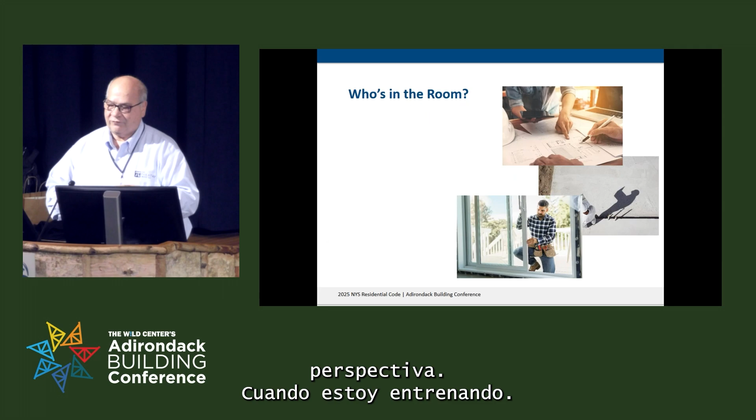Guess what, I speak all three languages. It's one that Wordly doesn't translate into, but I understand the problems of every one of you, so I try to put that into perspective when I'm training. Hopefully that'll help us through.

The other thing is, if you have questions during this, ask them. If it's timely, or I can stop, we'll stop. I'm hoping to leave time at the end, even though everybody will be itching to get out by then, to ask some questions. So let's have a dialogue, let it be you and me just having a conversation here. If you got questions, let's talk them back and forth. Like Josh said earlier, he likes to learn from these events as well, and I have open ears and an open mind, so I like your feedback too.

So we've got all these folks here, that's great. In this new code — well, in your day-to-day work, but in the new code — what do you guys find is your biggest challenge coming every day building? I know the code officials' biggest challenge is, probably I'm speaking for you, but there's a new code here, and I've got to get everybody on board to understand what it is I'm asking for.

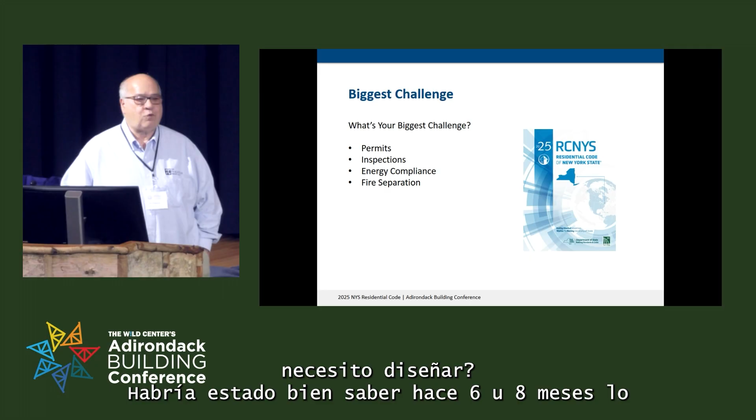So we can start getting the plans. The designers, you probably are saying, what do I need to design? It would have been nice to know 6 or 8 months ago what I needed to do for my projects that are now happening. Would have been nice to have the tools like ResCheck and ComCheck already built. They were in the works, by the way.

I'm a private consultant, but I am a contractor for NYSERDA too, so I work with Chris Scroy, who was here this morning, and I can tell you we had put all that stuff out for proposals. It was under contract, and we got it done as fast as we possibly could. You got to remember, the code really wasn't finalized until like September or so, so it was hard to get. And plus, the people who do ResCheck and stuff, they're also a government agency. If you can imagine how hard your life is, try taking two government agencies and trying to get them to agree to do something.

Hopefully one of these four are your biggest challenge. We're going to talk about the fire separation part of it today anyway, because there's a new emphasis on some of that stuff as well.

I'll try to keep the energy part out of my head, but they go hand in hand, and that's why I liked having the residential code with the energy code today. We're going to cover what's changed, and talk about some changes with administrative requirements and documentation, plus life safety and fire and life safety changes.

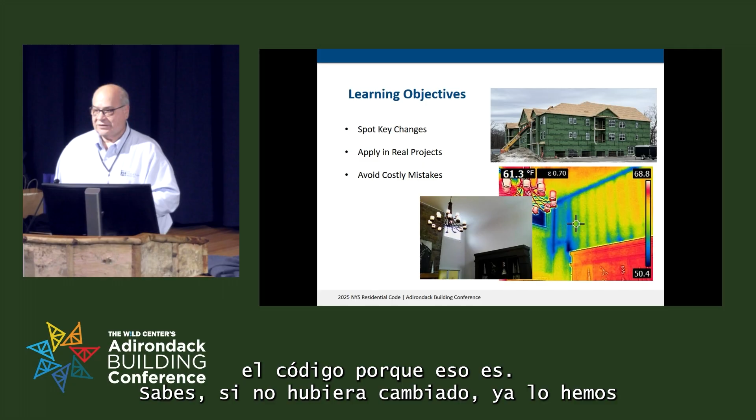So I'm hoping today you'll be able to spot the key changes in the code, because if it didn't change, we've already been doing it, let's just keep doing it, right? We'll be able to apply these changes in real projects, and hopefully avoid costly mistakes. Avoiding costly mistakes is going to come from a lot of thinking about your project ahead of time, thinking about what's needed ahead of time.

Your resources: as you probably know, our code, the 2025 Residential Code of New York State, is a modified version of the 24 IRC, just like all our codes, modified from the International Code Council's. So that's your biggest resource, our code. Don't follow the IRC so much, you want ours. There were a lot of significant differences in ours than there is in the ICC version.

However, one of the books I do like is the code commentary, the code and commentary from the International Residential Code. Even though that's not specific to New York, it's very handy. The commentary explains why and what it means, kind of puts it in layman's terms for us. There's also a book the ICC puts out called Significant Changes of the International Residential Code, which is handy as well. But remember, don't take it verbatim because it's not the New York specific version.

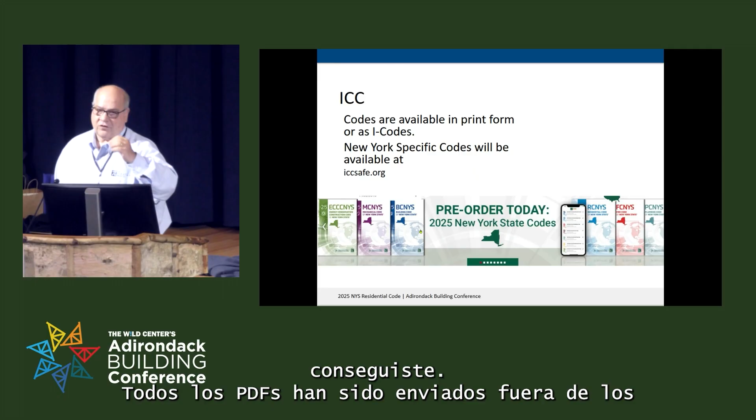NYSERDA funded purchase of a bunch of code books for the code officials. It's been dealt with through the DOS, and there was a survey put out last year asking every jurisdiction how they wanted their book, whether PDF or hard copy. However you responded is how you got it. The PDFs have all been sent out, the PDF rights or permissions have already been distributed. I believe the hard copies have not come yet or are coming. So if you're an authority having jurisdiction and you don't have your book, if you replied to that survey, which I think almost everybody did, you should be getting it.

Yes, thinking about that, I was at a state training. Got our books.

You should have your books at least a month or two. They actually did a pretty good job getting them out to print, getting them ready, which I'm surprised. And it's nice that this time it's a New York version rather than having to go to the ICC version and then take our amendments and then take our past amendments and so on. But thank you for that.

So you can get the books at iccsafe.org. If you don't want to purchase them, you don't have to. There's a free version of the New York State code on there. It just limits you in what you can do, you can't cut and paste, you can't search, well you can't use the AI search type of things. But it's free, it's the complete code. You can open it, and if you use Windows, there's the Snipping Tool you can use to capture it.

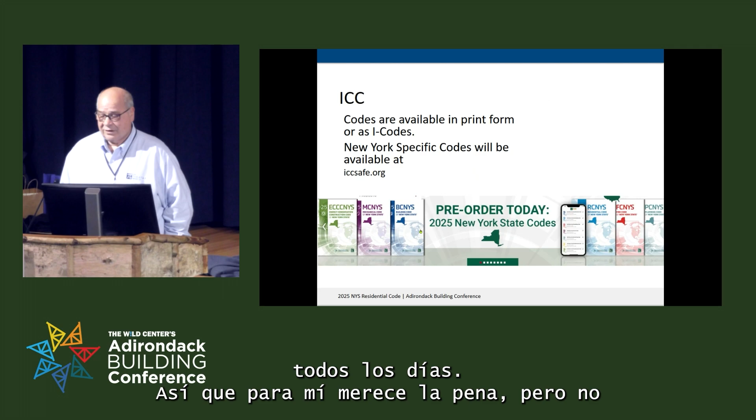But I don't have council or budget people to answer to. I just say to myself, do you want to spend it? And I say yes, and so I do. Unless it's something big, I have to ask my wife, and then the answer is always no.

Another place to use codes is upcodes.com. I love upcodes, it's simpler. It's more direct. I like it too because it has all the states in it.

ICC doesn't like them. They're back and forth in lawsuits all the time. But there's free versions of it. It's limited to what you can do with it, but it's very robust.

If you have the subscriptions, they have diagrams. When you search their stuff, it's a much better search than the ICC, as far as I'm concerned. So that's another place. There's no excuse not to have the codes because they're available for free either place.

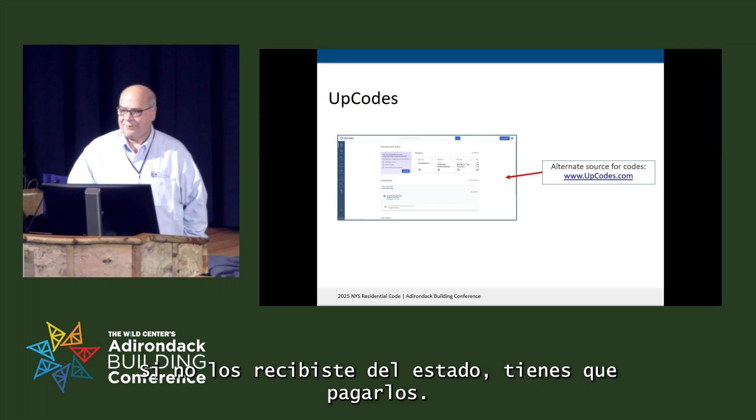Again, for code officials, your department's got to, if you didn't get them from the state, you got to pay for them. It's your tools, right? They got to pay for them. All right, so that's just a little bit on that.

Let's talk about some of the administrative changes. The first one is information on construction documents. In section R106, it talks about this.

Now this is a little bit condensed, right? But if you go to the energy code, you're going to want to see a whole list. There's 19 items at a minimum that they want on the construction documents for the energy code.

As far as specific things, and these are all New York specific, they have to be clear. Clearly define the work, the location, the nature of the work, the extent of what's happening.

They want to be able to be, I've seen some plans, and I can only imagine what you code officials have seen out there. You know, you talk about napkin sketches, that would be a good thing some days.

So I think maybe some of this bark on here, or a 2x4, a set of plans on a 2x4. Depending on what you're doing, that really doesn't work.

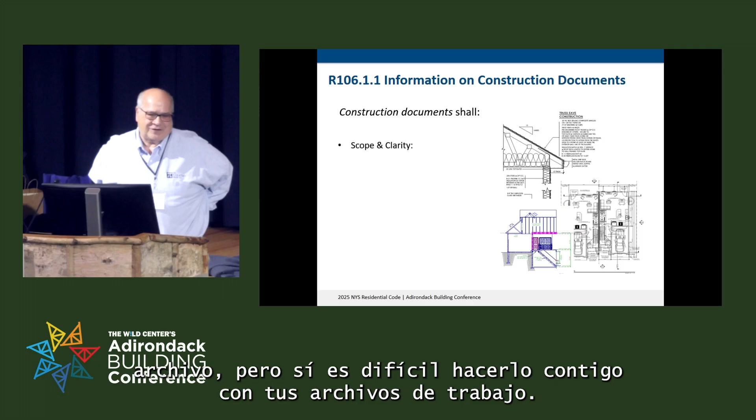It's also hard to file, right? Well, it's not hard to file with a file, but it's hard to file with your work files. So the point is, give a good set of plans, right? Make them clear. Make sure they show all the work that needs to be complied with or that conforms with

the uniform code, the energy code, and other applicable stuff. If there's something, we keep talking about manufacturer's instructions today, right?

If there's something that's required, it's New York specific, fireplaces, right? The old fireplace boxes, they have to be UL standard. Well, I remember years ago, I'm from down near Albany, and it was a town down near Clifton Park.

You guys probably maybe know of it. They had a big issue with fireplaces. I'm talking back in the late 80s or so.

And ever since then, it's been really important that the fireplace installation requirements and that UL approval part of it has been provided, right? Now, what else do we have to provide?

We have to provide manual J's, right? Many people use the REScheck. You know, it's not required, but many people use it. I would say more so than ever now, I think it's a great tool to use because of, in the

Energy Code 408, R408, with the option, the additional items that are required, it provides a tab for you to do the check off of what they are and keeps a running total.

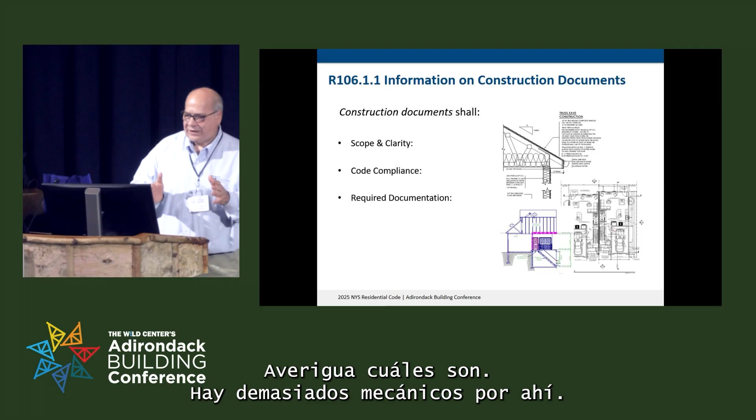Show compliance, provide the required documentation, manual J's. Hey folks, please read those. Learn to understand them, find out what they are. There's too many mechanical guys out there - I'm going to take my nice hat and bad hat off - there's too many mechanical guys out there that don't submit them till later. They prepare them based on what they want to put in and not what is actually required.

I have this fight all the time. I'm also a HERS rater, so I get these and we have to review them as well, and I send them back. It's a fight with the mechanical guys all the time, and that's why I'm ready to fight with them over heat pumps, because I've been fighting with them over everything forever. But read those, understand them, take them on your inspection, and make sure what's on the manual S matches what was installed.

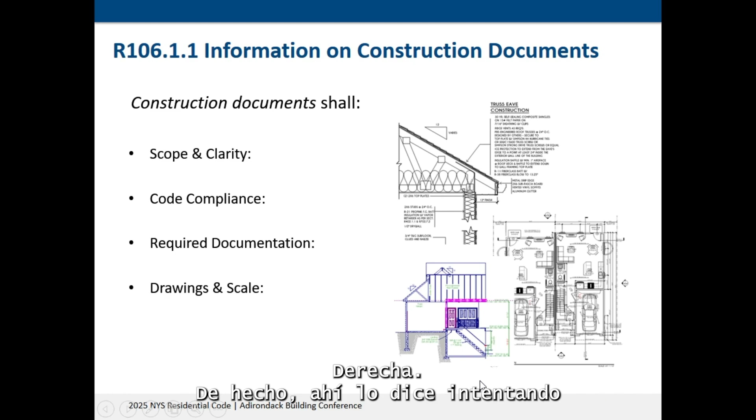Make sure your required documentation is there, whatever is required by the code and specifically by your jurisdiction. Make sure the drawings are to scale - it actually says that in there. Make sure the dimensions drawn to scale, legible.

How many of the code officials here, does your jurisdiction take online permits? Good. If they don't, that's another program coming out from NYSERDA - we're setting up online permit application software for any jurisdiction in the state that wants to do it. So tell your bosses to keep their eyes open, or if you're the boss, keep your eye open, pay attention. We're going to be paying for at least a year of it and helping get set up and offer training on it and so on.

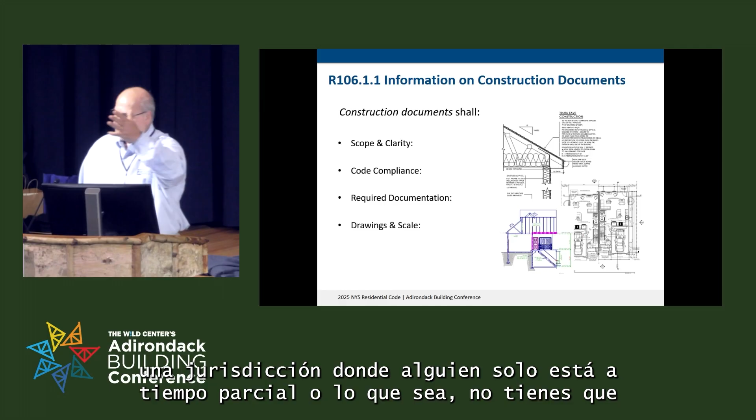That's good news to the rest of us, right? It's a lot easier to submit things online. The clock isn't there - if you're in a jurisdiction where somebody's only there part-time or whatever, you don't have to wait till they're open and so on. But you got to make sure you scan that napkin before you send it in with the application. Otherwise, you can't just submit that in person, right?

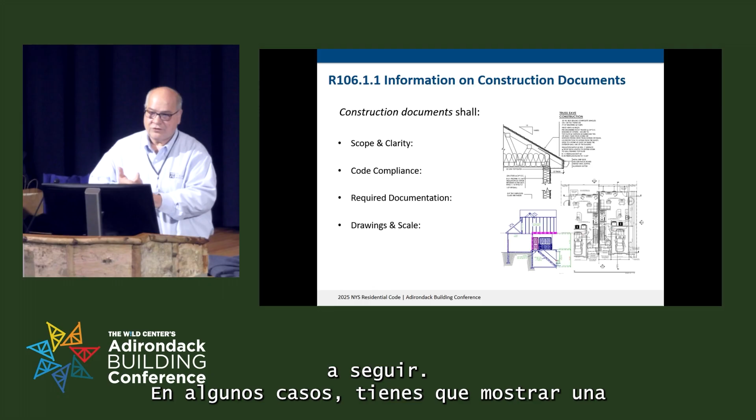That's the first part. Let's make sure that our plans are clear, the scope is well-defined, they show compliance. One of the things the energy code is going to tell you, you've got to choose the compliance path that you're going to be following. In some cases, you've got to show a lighting power density now, even in residential. In some cases you have to show those options where you're getting the 10 points. Well, if you're using REScheck, it's right there, right? So those are some of the things, besides having that red line Kevin was talking about before, showing us where the air barrier is.

But don't go out in the field and look for the red line - nobody ever paints it on there. I've been looking for it for years, and everybody looks at me crazy.

Make sure you've got the required documentation. You're going to hear a theme from me in this whole presentation: documentation, prior planning, and it makes everybody's job simple. And guess what - all your clients, yes even the code officials, they're your clients too, get the building that they're looking for. And we're all happy, and hopefully we've all made some money along the way. After all, I don't know about you guys, but that's why I come to work.

Plus I love this stuff. It's cool watching the buildings go up and being a part of it, making them more resilient and durable so they're there. When you're gone, Kevin's gone, your kids will be enjoying the fruits of your labor. So that's what I look forward to - not going, just enjoying the fruits of my labor.

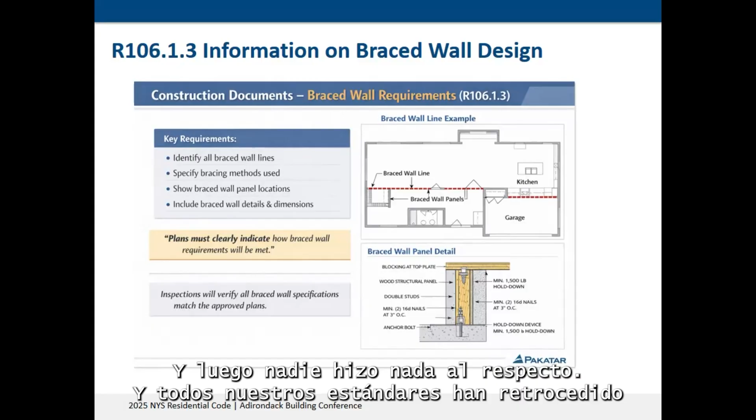The only reason we got it before then, the last one before that - the only reason we got a new code then was because of the stimulus money, the ARRA money they were throwing around to get states to adopt new codes and save money and get to 90% compliance and all that. And then nobody did anything about it, and our standards have all rolled back to before then.

Anyway, braced walls - it's up and up and up. Now we want all the locations of the braced walls shown, right? We want to specify the methods that we're using, whether it's site-built or a panel. There's two different terminologies - make sure you've got what it is you're going to do.

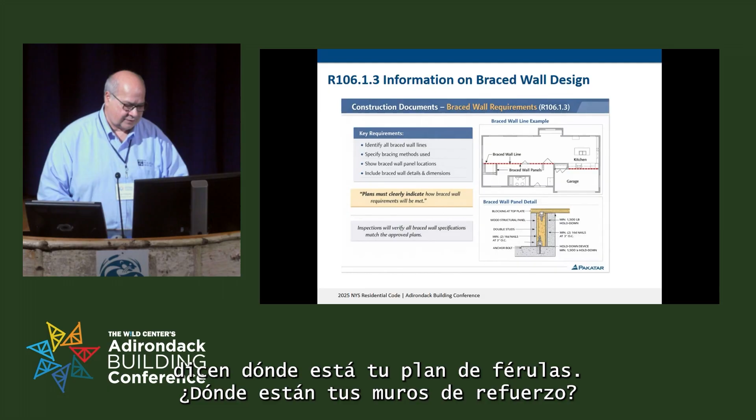Show the locations, right? The plans have to clearly indicate that these requirements are going to be met. The inspections are going to verify all the braced locations and wall specifications. They have to match the plans, right? So there's another thing. You're going to do the work early, so when they come out and inspect it, they don't say, "Where's your braced plan? Where's your braced walls? Where are they supposed to be?"

First of all, he wouldn't have given you the permit if you don't show him. So that's going to be your first delay. Time is money, right? Time is money. The longer it takes to get that permit, the longer it is before you get that final payment on that house and close it, the more interest you're going to be paying while you're building it. So show the braced walls.

If you're building in flood zone areas, you have to show the design flood elevation. You've got to show the lowest floor elevation, including the basement, what that elevation is. You have to include the V and A zone foundation anchoring details. And you have to include all sea level rise additions. So this is all part of building a more resilient home too, knowing where you're building.

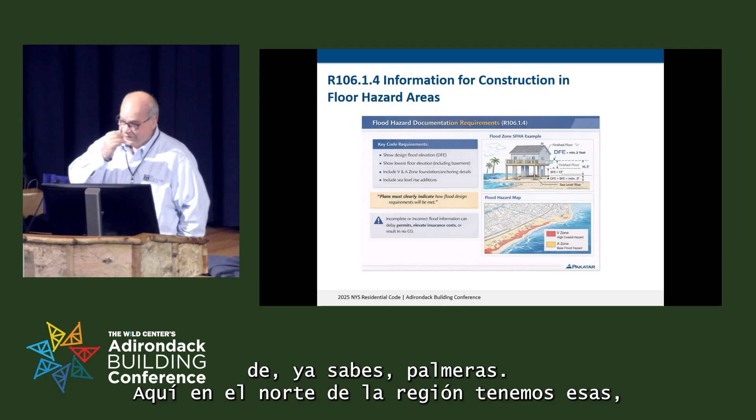Even those lakes, it's not just, I show a picture here of palm trees. We've got those here in the North Country. But, I don't know, we don't have them in Albany. I just did that for here.

Anyway, you must clearly indicate how the flood design requirements are going to be met. More information, clarity on the plans. Some of the common plan review failures are missing that energy code compliance path, right? Incomplete details, so we don't really show.

It's not always easy to show the air barrier. Where do you show it? If you've got a bunch of sections, do you have to show it on each section because it's different, right? You've got to show it's continuous. You also have to show a detail where it changes from the wall to the roof. We've got to call it, balloon that out or something. That's one of the incomplete details. If you just show me a red line, how are you going to make that happen? I want to know how that's going to happen, right?

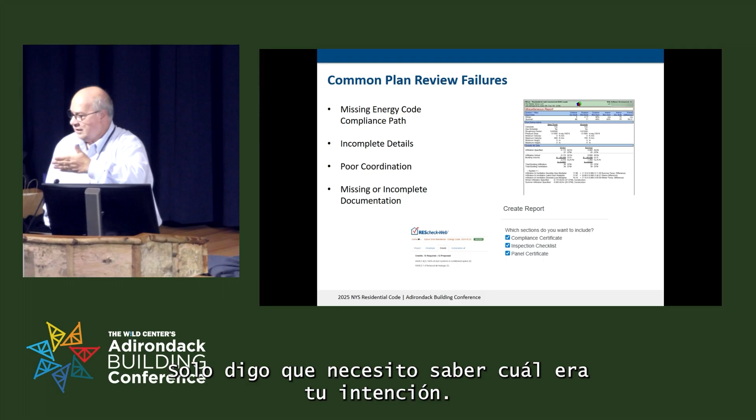My first job as a plan reviewer is to question. I'm not saying that I know better than the designers. I'm just saying that I need to know what your intention was. Because if I'm not figuring it out, how can I expect the builder to figure it out? And how are we going to know that it gets done? You don't want us all guessing and we get out there on the site and we have to fail an inspection, or whoever the third party is, if there is a third party.

So poor coordination, right? We're not communicating back and forth. Who's doing what? Missing or incomplete documentation. Same thing. Do I have the manufacturer's installation instructions? Do I have my Manual J report? Do I have the REScheck? This one image of the REScheck is where it tells me I'm required to have 10, and I've got 12 on the project. I just took a screenshot. The other one is, what am I going to print?

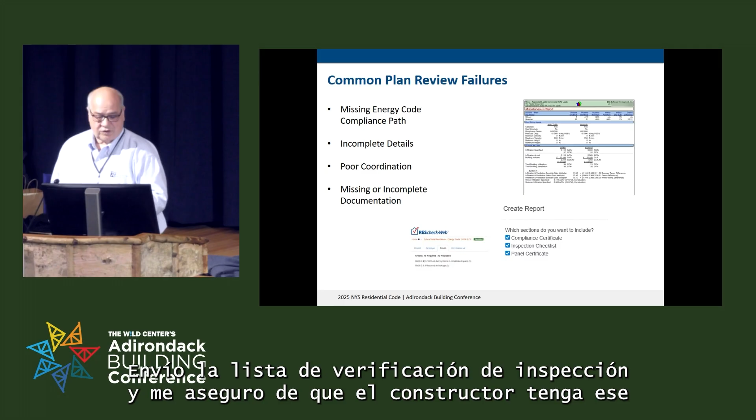If I'm submitting something using REScheck, I submit the compliance certificate, I submit the inspection checklist, and I make sure the builder has that panel certificate so that they can just fill it out and put it where it's supposed to be. However, the panel certificate that's provided with REScheck doesn't quite meet the new code requirements. So I've asked PNNL to see if they could modify it, but that's a huge lift for them.

Give me a break. So they can write all this other stuff, but they can't make a form. They're computer geeks. How is it hard? All they do is mess around with computers. I could probably get my 9-year-old grandson to figure it out for me.

But anyhow, these are the types of things that I'm hearing about coming back, right? We want to look for that. We want to be careful. Designers, do the work early, and make it happen for us. Builders, now we all know too that in residential the sophistication of what we do varies, right? We may be building a little shed, we may be building a multifamily apartment project or a bunch of townhouses or something like that.

So, in other words, there may or may not be an architect involved, there may not be one needed. It might be the builder doing his own type of stuff. So I'm saying it to all you guys, do good plans. Include the stuff on there. One of the things I found, because I used to work as an estimator too, so when you get old like this, you've done a lot of things, right? So

what I always found was when I'm estimating, I know a good set of plans because I'm looking for that information. If I can't estimate it, I can't build it, because that's what I'm doing when I'm estimating, I'm building it. So think of yourself as an estimator when you're putting together a set of plans. Right?

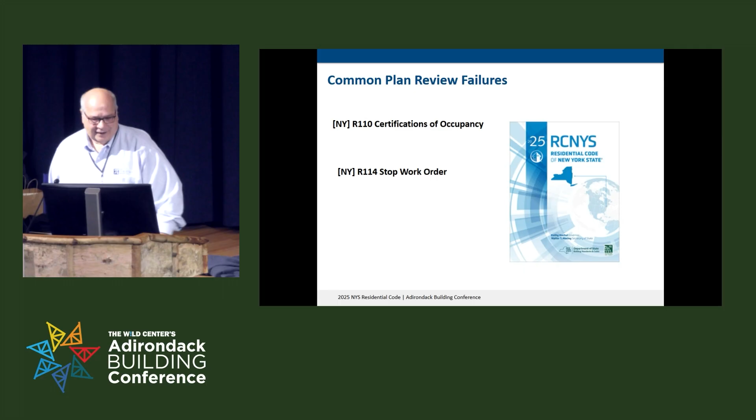And this was a typo on the headline up there, but I missed it. Just a couple of reminders. These really weren't changes, just reminders: buildings or completed projects are not to be used or occupied without a certificate of occupancy being issued by the authority having jurisdiction. Nobody's ever done that, right? You don't have any problems with people occupying buildings? Never?

No, DOS. DOS is the only one. By state law they are the ones responsible for the code being administered and enforced. So I'll just use you as an example. If, for instance, he's refusing to give you a CO and you've got all your ducks in a row, everything's right, he's just being obstinate, right? Then you can call DOS and they will step in.

And they've gotten a lot better with it, and they're doing a lot better responding to their helplines. They've got one for energy and one for regular codes. They just implemented it. And they've been hiring people. The problem is, one of the other things I'm working on with NYSERDA is we're developing a pathway to get people prepared to go into the code official position, because what we understand is 50% of the code officials in the state are going to be retiring or leaving in the next 2 years.

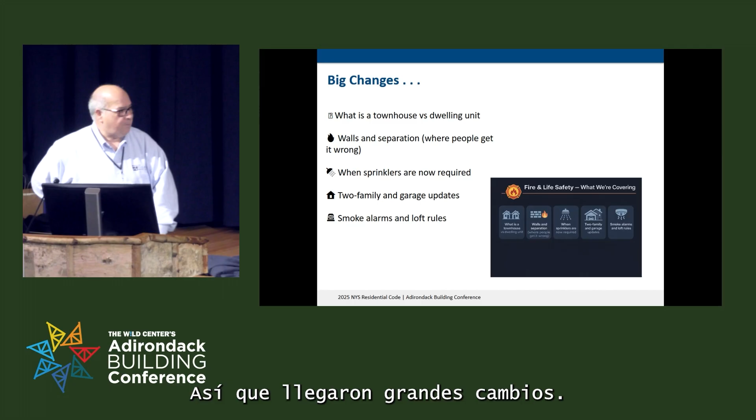So, big changes came into the townhouses, right? Spoiler alert: the big thing about townhouses is the separations, and quite a few of them have to be sprinklered, right? That was the compromise. Hold on to your boots. I'm willing to put Kevin's next week pay on the next code cycle: it goes to the houses too, goes to single families too. That's what took us 5 years to get a code. They were ready with most of the codes for 3 years, 3.5 years, and they've been fighting over sprinklers since.

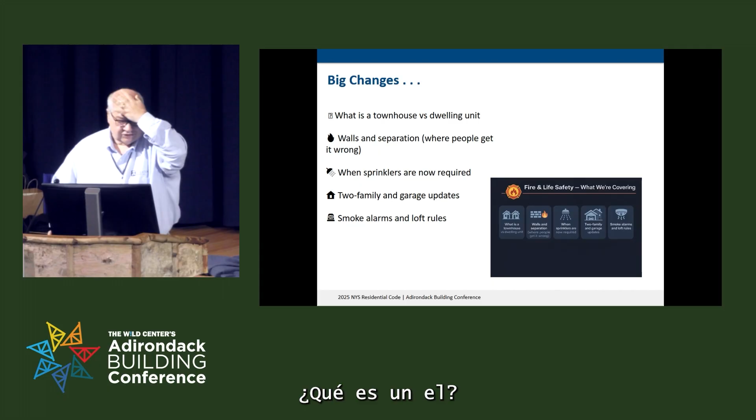But anyway, big changes, right? This is where it gets very confusing, and most of the mistakes are happening in this area with the new code. So first, we're going to start with the definitions, right? That's really what's driving everything.

So my problem is I have most of my notes here memorized, but I have too many notes because they say, don't put anything on the slides. I'll speak it, and I haven't remembered it all yet. So I'm going to try to remember for you, right? Yeah, and now, oh, there it goes. But before it was changing this. Oh, thanks. That's because I'm working right-handed. I'm working with a handicap. I'm left-handed. Okay.

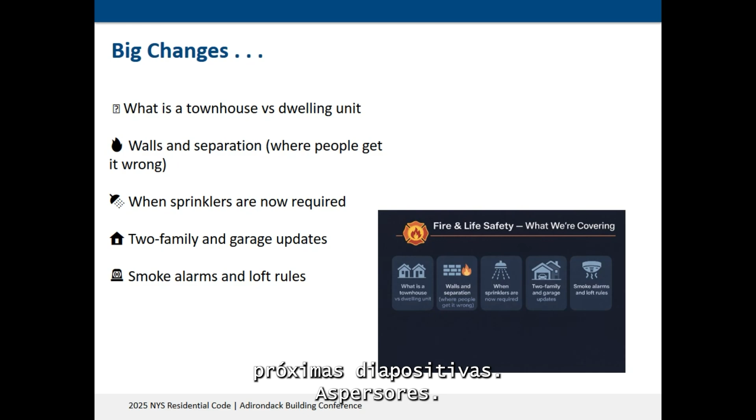Wall and separations. That's our first thing, right? This is where we get it wrong. There's a lot of different types of things. We'll look at that a little bit more in the next few slides. Sprinklers, we're going to talk about that some more in the next few slides, but we're going to talk about when they're triggered. When do you need sprinklers? To me, that was a big change. I don't know about the builders. Probably not too big a change for the designers because it ain't coming out of your pocket, right? But you still got to work around it.

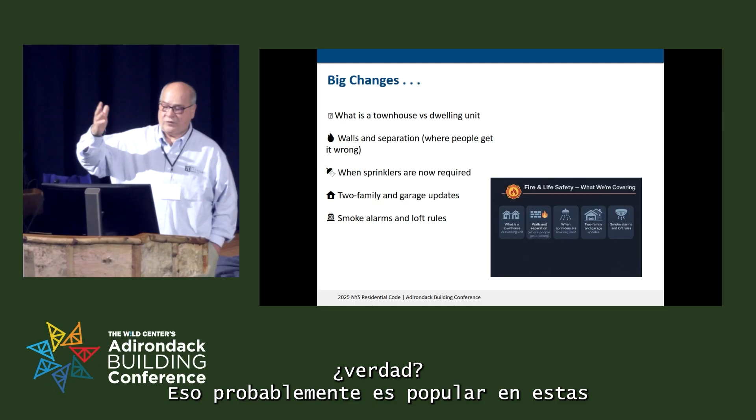Two-families and garages, there's some clarifications and some stuff there. And smoke alarms and lofts. Lofts actually have a definition now, right? That's probably popular up with these weekend houses and stuff like that. The smaller ones, not the 10,000 square foot ones the guy was telling us about before. First, we'll start with the definitions.

Right? When the code says townhouse, it's referring to the entire building, not a townhouse unit. The entire building, and it has to be 3 or more units in order to be considered a townhouse. So our 2 units are not, right? They have to be 3 or more units, and it's the entire building. Townhouse unit was added, and that refers to a single dwelling unit within the townhouse. The dwelling unit is just a single living unit in either a one-family dwelling or a two-family dwelling, or it could be a townhouse unit, right?

All of these definitions are in Chapter 2, which reminds me of something I wanted to mention to you. To me, one of the most important parts of every code that we deal with, energy, fire, building, residential, is Chapter 2, right? That's where you go to find out what it is you're talking about. When somebody refers to something, you got to go there and look, because it means something different in each one of these, not always, but sometimes residential has a different definition in the energy code versus the building code itself. So refer to the code you're working in and refer to that definition, right?

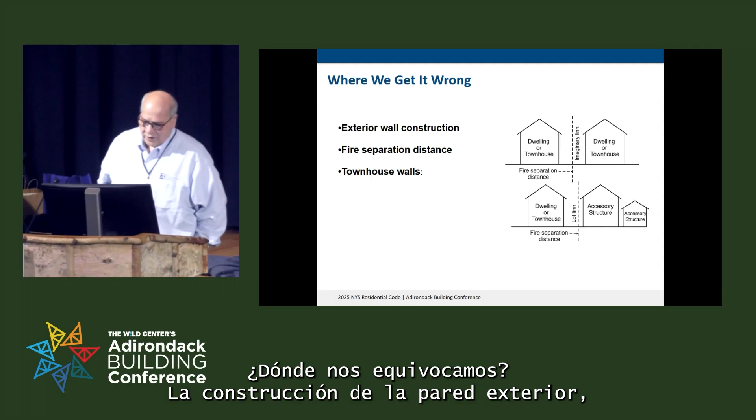Where do we get it wrong? The exterior wall construction, fire separation distance, townhouse walls—all of those are dealt with now. The exterior walls under the new residential code, we're really talking about how close your building is to the property line, and whether or not the home or building is sprinklered.

Because it makes a difference. We're going to look at that more in the next slide, but for the exterior wall construction, that must comply with the fire separation requirements—you're going to remember this now, I'm going to quiz you on it. Table R302.1, Table 1 or Table 2. Table 1 is for non-sprinklered buildings, Table 2 is for sprinklered buildings.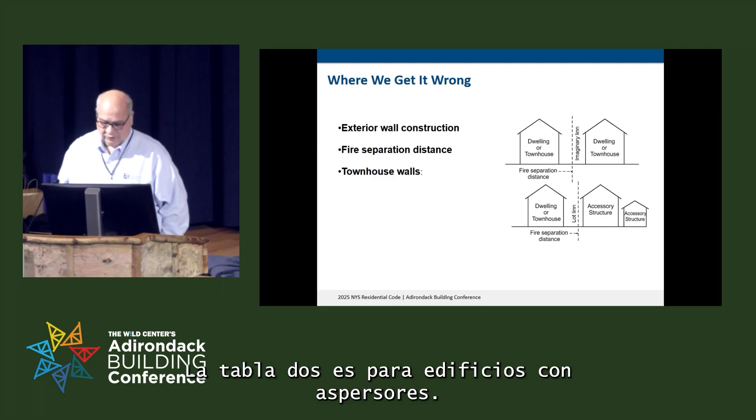The fire separation distance is the distance measured to lot lines, or to an imaginary lot line between the townhouses on the same lot—I'll show you that in a second. The townhouse walls are just shared walls; we'll call them tenant separations, though they're not really tenants since they're generally owned. It's townhouse walls, or separation walls.

Right, and here we go. The fire separation distance now applies to walls between the single units—these purple walls. It's the fire separation distance between the units in a single townhouse building.

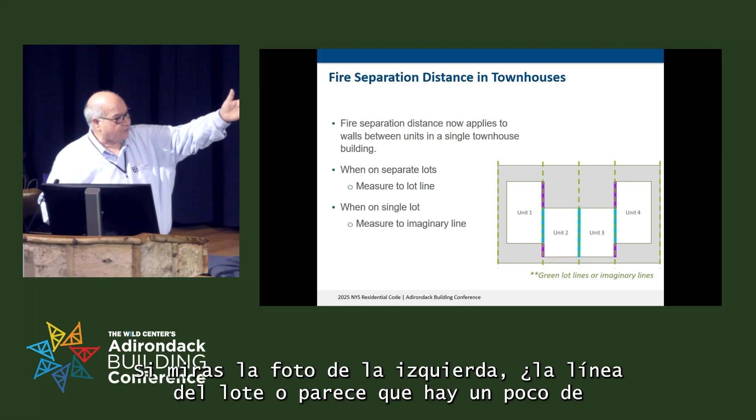If they're on separate lots, that's measured to the lot line. If you look at the picture, on the left is the lot line—there's a little bit of separation there. Then we've got the green lines in between; those are our imaginary lot lines, just made up by the association. For the interior units, those are the property lines that we measure our fire separation distance from.

A little better here, right? So here we go to the green lines—the imaginary green line is the property line. The purple lines are the fire separation distance, which goes to that table. I don't expect you to read it or understand it, but that's Table R302.1.

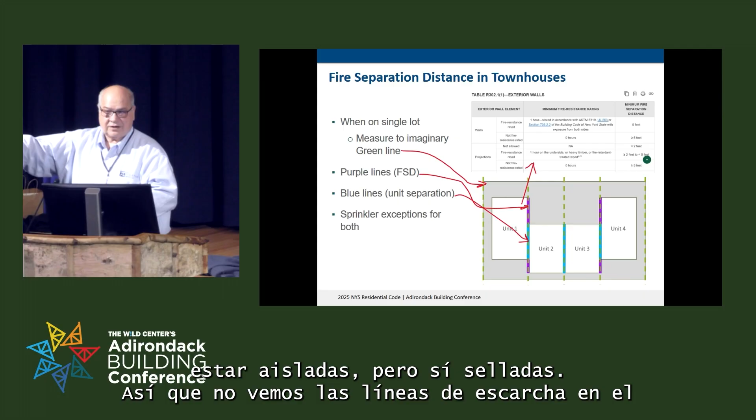That'll tell you the walls have to be X number of feet, depending on what it is—this one's for unsprinklered. The blue lines are, for lack of a better word, the tenant separation—it's the common walls. We learned earlier today that they not only have to be insulated, but sealed, so we don't see frost lines on the roof where they're separated.

Yeah, I was paying attention, Kevin. And sprinklers—there's exceptions for both. We're going to talk about the sprinklers here in a second. Just making sure.

Here's just this graphic that kind of summarizes it all for you.

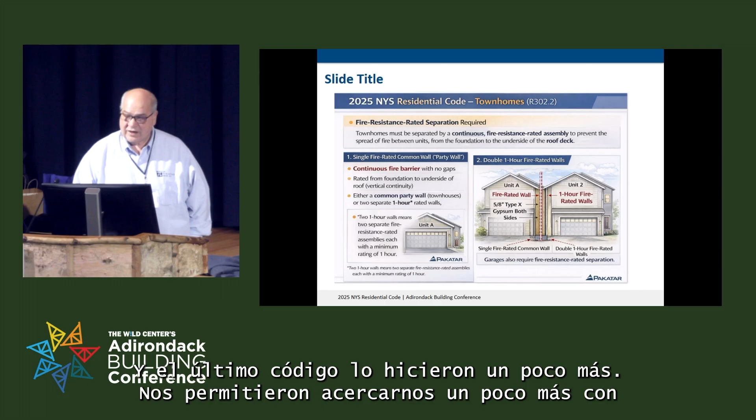In the last code, they did a little more—they let us get a little closer with overhangs and stuff if we built them a certain way. This code, we got a little more clarification. See, we can't fix everything at once—otherwise all these code people, the guys who write the codes, won't have jobs. It'll all be done and we'll have a perfect world, and I won't have any place to teach, so on and so forth.

Here's the comparison—I'm sorry, that last one wasn't. So this just shows you the distance between the imaginary lines, whatever it is. It's good for reference.

Typically what you're usually going to do is put in that it needs to be a 1-hour wall. The code doesn't tell you how to build a 1-hour wall, so you have to get the design number—either the UL design number, or National Gypsum, or USG, or somebody's book with a design number that's been tested and approved that tells you specifically how to build it. You need to have that either on the plan or have the written cut sheet there so the code official can verify it—unless it's their first day seeing a building, they've probably seen it before, like you were saying earlier. If it's the builder, they know—you've seen them build this before, you know what it is. You're not as hard on them, but anyway.

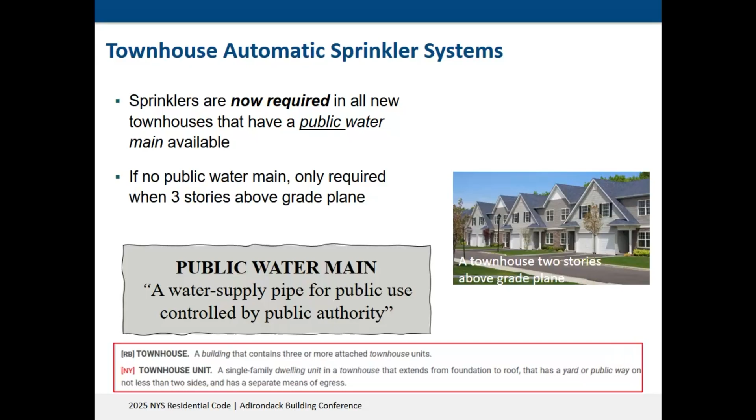The code tells us in the definitions part that a public water main is a water supply pipe used for public use, controlled by a public authority.

So that's it. That's the big thing. That's the biggest thing I got for you guys all day. So you can go now.

Honestly, when I was first reading the code, that was my most exciting part. I said, whoa, that's a big one. At first I was thinking the same thing about 2 units, side-by-side townhouses, till I read it and understood it better. I thought that's a big change if it's 2 units, right? But since a townhouse is only 3 units or more, it doesn't matter.

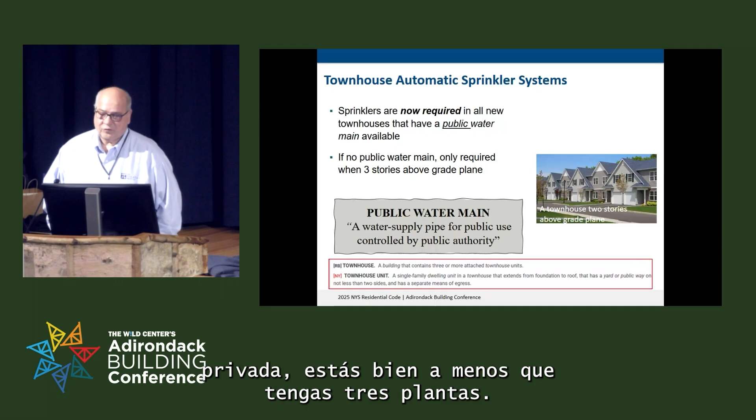So if you're building with private water, then you're good unless you go 3 stories. But if you're building 3 stories out of wood anytime, you're going to need sprinklers. So that's a big thing, and that's something to look for, a trigger to watch for. If you're coming up with a new project or a new neighborhood, you need to know for sure whether you've got the water supply, or whether you're planning not to, and how you're going to deal with it.

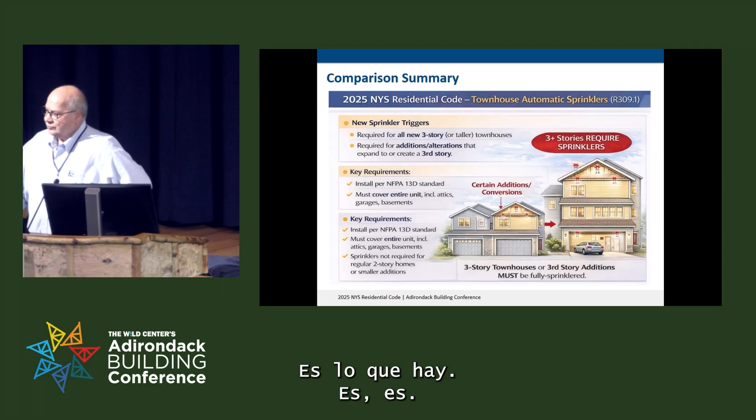I was going to say, there's no grandfathering on it. It is what it is. It's unfortunate, but there's reasons for it.

Everything with the code has to do with safety, right? As far as it's been, they track all these accidents or incidents across the country over time, and they determine that things need to be fixed. Apparently there's a lot of fires in townhouses.

It's not that big a deal. The builders, correct me if I'm wrong, their biggest issue with sprinklers is what if they go off accidentally. They're going to ruin everything, but probably save somebody's life. They can go off accidentally though, and that's the argument. They don't want it being another warranty issue.

I do think we could do it a little bit different. We could pace our way into it, but ultimately it's not the end of the world. In Massachusetts, they have your base code, a stretch code, and a super stretch code. The super stretch code is really their electrification code. If you don't want to build it all electric, then you can build the way you want, but you have to prepare it to be all electric.

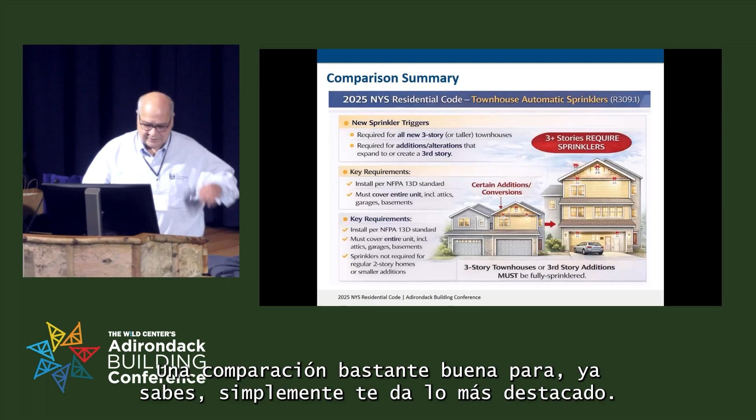Yeah, that's a local law. That's not statewide that I'm aware of. No.

Okay, how about this one? Sprinklers required here? Yeah.

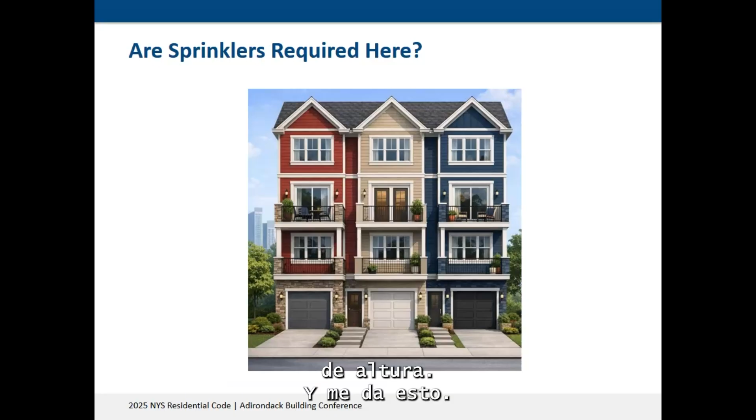I took the image anyway, but I asked ChatGPT to make me an image of a 3-unit townhouse building, 3 stories tall, and it gives me this. It looked good, and it got through, so. But it gave me that one too. First time it gave me that one, it made it 3 stories even though I asked for 2. But it beats drawing it myself.

Okay, so we're out of townhouses. We're all good with the townhouses. We know they may need sprinklers. We know that we've got fire separation distance issues that we have to consider. We have common buildings, what's an exterior wall? We're all good with that.

Let's go to 2-family homes. They're a lot simpler, right? Been building them for a long time. Well, been building townhomes for a long time too. It doesn't matter on a side-by-side 2-family where the lot line is. It's 1 lot or 2 lots, the separation between the 2 units is the same, right? There's no separation distance required, unlike a townhome. There's fire rating in that common wall, but there's not any separation distance.

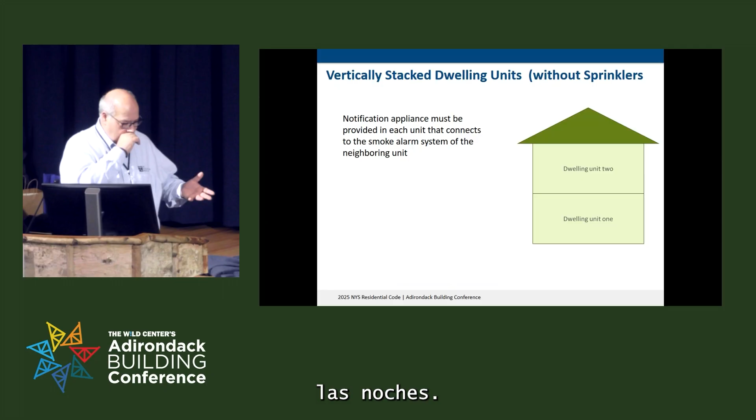Unlike townhomes, we can stack these units. We can vertically stack the dwelling units, right? If we do, you have to provide a notification appliance in each unit that connects to the smoke alarm system in the neighboring unit. So when my wife burns dinner every night, the people next door are going to get annoyed. Unless she really does a good job and it's like, hey, get the hell out of here. Right? Your kids aren't here anymore, right?

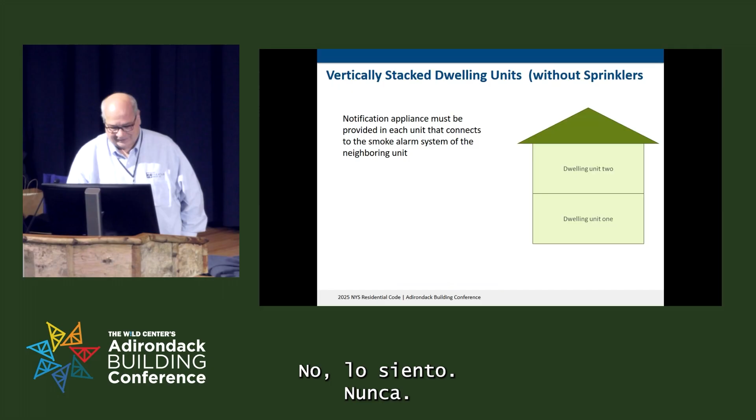So when there's no sprinkler system, right? If there's no sprinkler system, you need a notification appliance. Now, that's not a term you usually hear in the residential code. That comes from the fire code. So if you want a better definition or options for notification, you want to understand more about it, go to the fire code. We'll hold that class at 4:55 today. No, sorry. Never if I can help it. It's just too complex for me.

Now, 2-family dwellings are permitted to have a door between the 2 units in the fire resistance rated wall. You can have a door between the walls. Before you couldn't do that. Now you can. If the building does not have a fire sprinkler system, the door must comply with Section 716 of the Building Code of New York, the commercial code, for a 1-hour assembly. When the building is sprinklered, it must just comply as if you're going between a garage and a house, C-label door. Okay, that makes sense?

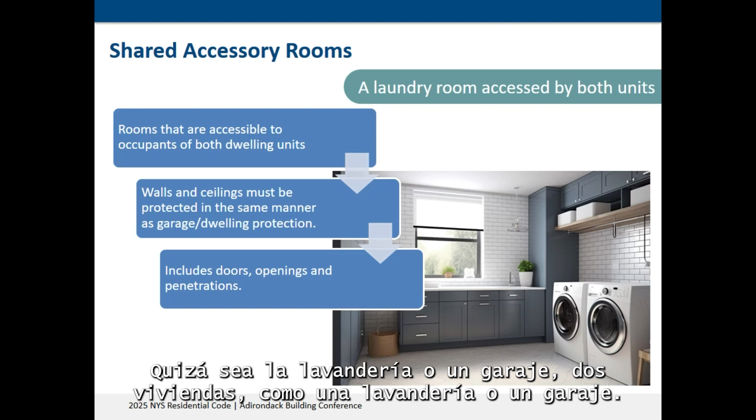Shared accessory rooms, if there's a common laundry room in the building, or whatever common room, right? This is a new section as well. It recognizes that you might have shared accessory rooms accessible from both units in the two-family, like a laundry room or a garage. It's really identical to the protection required for a garage dwelling separation. Again, you need the 5/8 on the wall, or the 1/2 inch on the wall, and one side 5/8, and then 5/8 depending on what the ceiling's like, or above it. The door has to be the C label. So if you've got a common accessory space, it's got to be treated like a garage. The walls are rated, the ceiling's rated, the floor, if it's on an upper floor, it's got to be rated too.

All right, private garages that are attached to dwelling units, separated, like I've been saying, in table R302.6, 5/8 type X if there's habitable space above it. The walls are 1/2 inch gypsum and it's a 20-minute door.

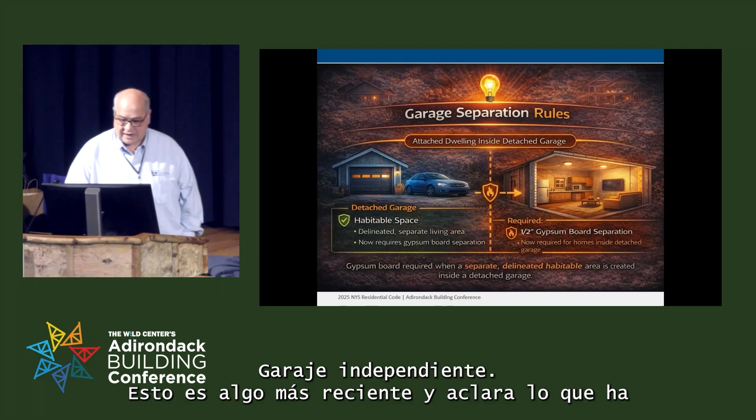Detached garage. This is kind of newer, and clarification of what it's been - people haven't really had it at the top of their list for catching.

The garage-to-dwelling separation rules now apply even inside detached garages, if you create habitable space. Detached doesn't mean exempt anymore. If you take a detached garage and add living space inside it, finish it off, or design it with separate habitable space from the start, now you've created a condition where separation is required. Even though they're separate, we're talking about that fire separation distance again. If it's clearly defined as living area, that's what triggers this requirement - you need gypsum board separation between the garage and that habitable space, just like between a garage and a house.

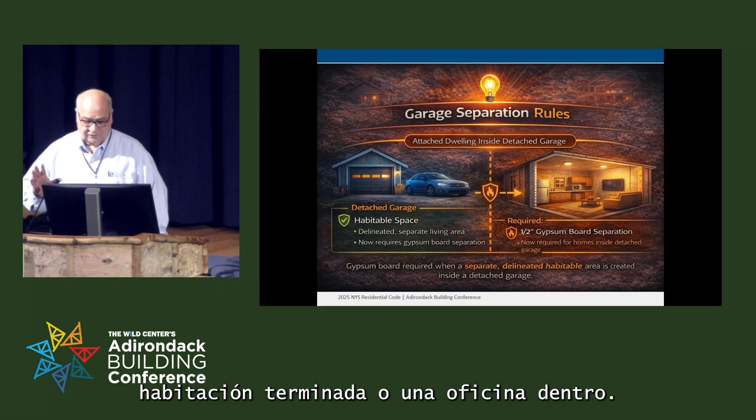Whether or not there's a bedroom - that's correct, if it's habitable space. So the question was, is that required even if there's a bedroom, or not? It's just habitable space that's being considered. So it's like a garage with an apartment above, or, even though it's detached, a garage with a finished room or an office inside - convert a garage space, all of those trigger this.

Okay, so the question was, what if this was like a boathouse or a boat garage where the boat's below and they add living space above it? That's a good question. And what was the second part?

Oh, an ADU, right - an ADU, definitely yes. If it's a boathouse, I would say yes, no living space above it without separation. We're required to have heat detectors in a garage anyway.

So you need to have heat detectors rated for garage conditions, and they have to be interconnected with smoke alarms in any garage, whether it's detached or attached.

What - oh, your boat slip? I don't know, Kevin was just starting trouble. We actually saw, Kevin - I saw a boathouse, Art, and not only was there living space above, but the builder decided to vent a kitchen and laundry exhaust into it. I'm not surprised - I believe they would definitely argue about what a garage is or isn't. As it was suggested, I think we'd have to look into the Chapter 2 definition of garage to see what that is. I guess I can't really answer that - I'm stumped. If I can't answer it, I want my money back too.

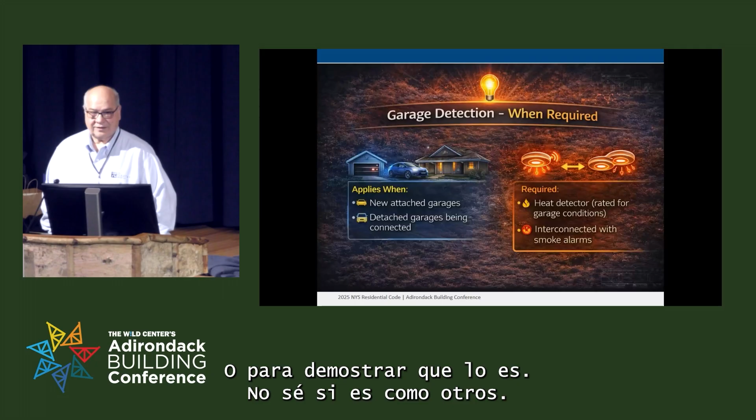Don't install the smoke alarm in the garage. You have to install a heat detector, and it has to be rated for a garage, so you're going to need a spec for that, or proof that it is - maybe there's a sticker on it that shows it's rated.

Okay, there's some new stuff on smoke alarms and where they're located. We're going to go through that over the next several slides. The first part is smoke alarms in sleeping lofts.

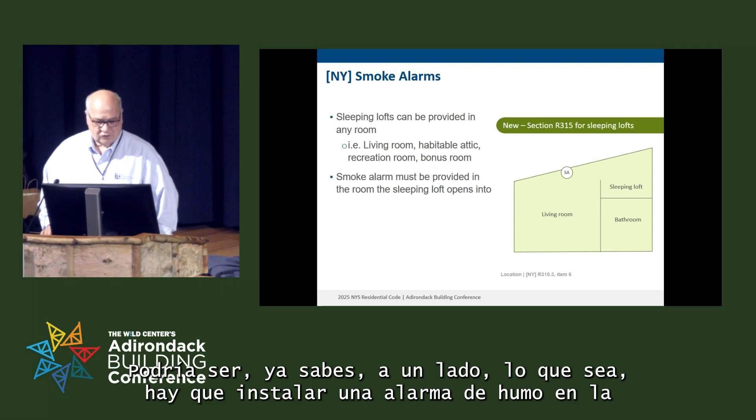A sleeping loft can be provided in any room - we'll talk more about what a sleeping loft is a little later. Sleeping lofts can be above a living room, or off to one side, whatever it is. A smoke alarm must be provided in the room the sleeping loft opens into.

Smoke alarms must be located in the immediate vicinity of the sleeping loft. It's the same statement for smoke alarms required outside of sleeping rooms. NFPA 72 clarifies the maximum distance in the immediate vicinity as 21 feet, so that's probably reasonable for our purposes here.

This one seems simple, but it's where we miss the details and fail. Smoke alarms have to be installed per manufacturer's instructions. It's like we get paid extra - it's like a drinking game, every time we mention it you can take a drink.

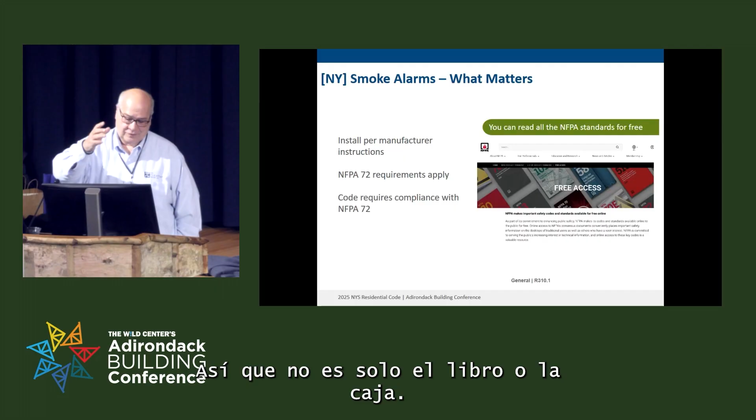Okay, so you have to install per the manufacturer's instructions - it follows NFPA 72, which tells you that. So it's not just the book or the box, you're following the national standard. The residential code now makes it explicit: installation has to comply with NFPA 72. So if it doesn't meet NFPA 72, it doesn't pass.

New to the residential code is a requirement that was last seen in the 1997 Uniform Code. When a hallway serving sleeping rooms opens to a room with a ceiling height 24 inches or more than the hallway ceiling, a smoke alarm is required in that room. So in my little graphic there, the hallway and the living room show a 24-inch separation in heights, so we're required to put one outside that hallway. The reason for this is the likelihood that smoke will rise to the taller ceiling before reaching the lower one.

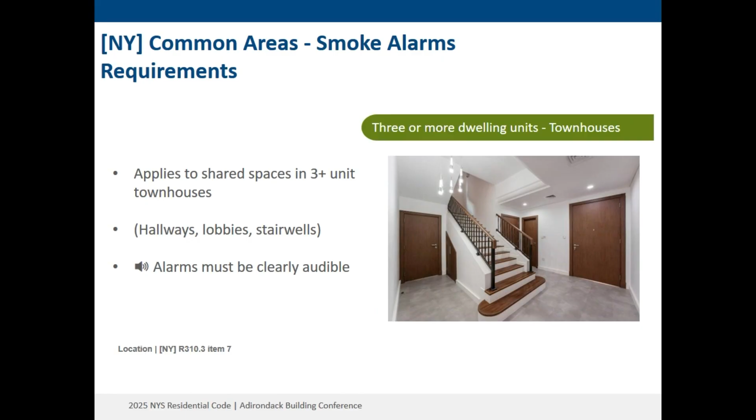Another new one that catches people off guard, especially in townhouses, it's in common spaces. If you've got shared spaces in a 3+ unit townhouse, like the hallways, lobbies, stairwells, you have to have an alarm and they must be clearly audible, not just inside the units.

When a floor area of a story exceeds 1,000 square feet, the total number of smoke alarms on that floor must be considered. This excludes the garage area. There are two approaches to this: the first is to be sure that all points in that story have a smoke alarm within 30 feet of travel, or smoke alarms required for other reasons can count towards this requirement. Installers are wise to carefully consider where the required smoke alarms are placed so that it can also satisfy this requirement. It takes a little bit of thinking when you're laying these out.

This is where the layouts start to matter. One alarm per 500 square feet - two versions of the same thing. How many of these am I going to have?

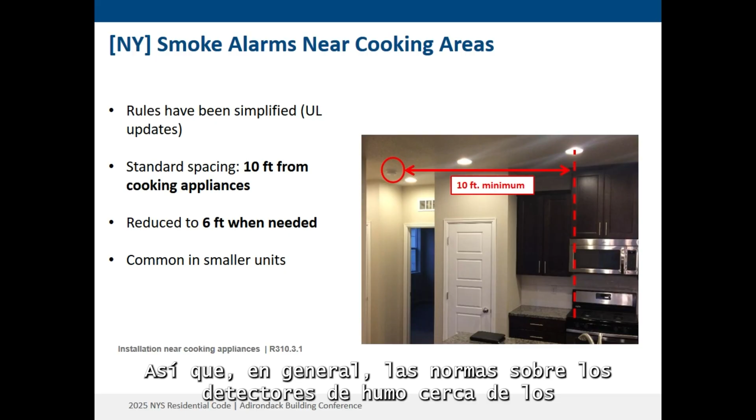Smoke alarms near cooking areas, the rules have been simplified. It's a practical change for us and solves a lot of real-world issues. So the big picture is that the rules around smoke alarms near cooking appliances are just simpler. They come from updates to the UL standard, not just the building code. As we were talking about reference standards and they change, we adopted a new version of the UL and it picked it up.

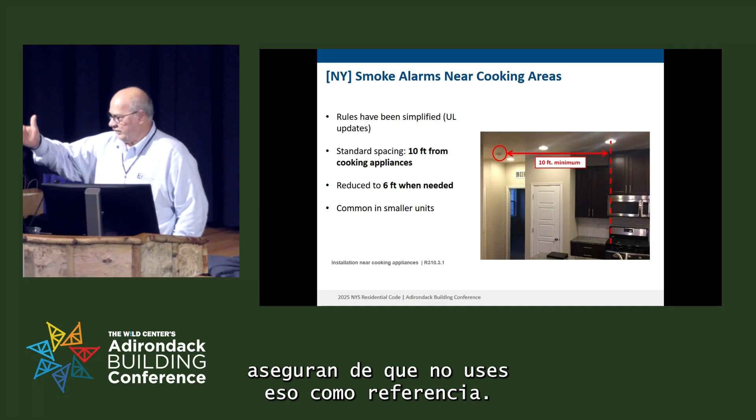When you're using a reference standard, or in backup, when a code section specifies you use a standard, it's listed in the back what version under the reference standards you can use. Kevin mentioned earlier the ASHRAE 62.2, 2018 version is in our code, but they get updated every 3 years too, so they're probably on their 22 now. Make sure you don't use that as your reference - if you're designing, use the 18 version, use whatever's in the reference standards. Use the correct version, and when you're reviewing, same thing.

The default rule keeps smoke alarms at least 10 feet away from permanently installed cooking appliances. This helps prevent nuisance alarms.

I don't know, my wife actually doesn't cook, so I was just joking before. There's a reason for that - the local fire department said they don't have enough people on staff usually, so they asked her not to cook. So I do the cooking. Well, she's eating late tonight. That's why I got a chuckle out of the nuisance alarms.

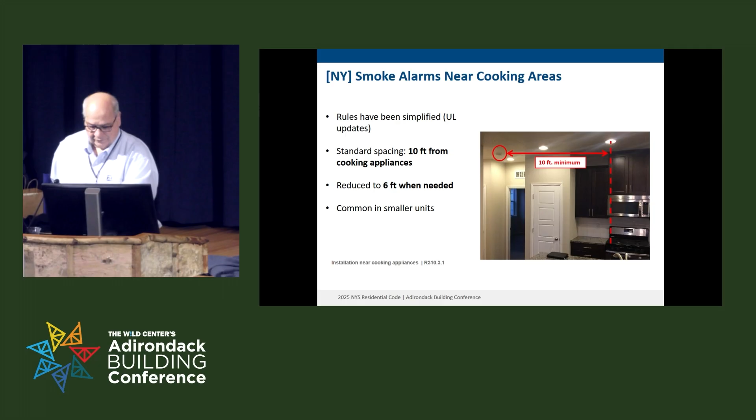But you can reduce that to 6 feet when needed to meet other placement requirements, so they're giving you a little bit of leeway, without saying 'do what you want to do,' because that's what they're really saying. Keep the 10 foot in mind, you can reduce that down to 6 feet from there if you need to. That helps the designers a little bit with their placements.

Sleeping lofts - told you we'd get to it. So what is a sleeping loft? It's a space designated for sleeping on an intermediate level or levels between floor and ceiling of a story, open on one or more sides to the room in which the space is located. It needs a permanent means of egress, special stairways, landings, ladders - it needs an egress.

For instance, in this little sketch here, they're saying that sleeping loft, because it meets the requirements of a sleeping loft, that's really only 1 story there, not 2. So my smoke alarm will work out there - that goes back a couple slides. It's considered part of the story it's in, just like a mezzanine.

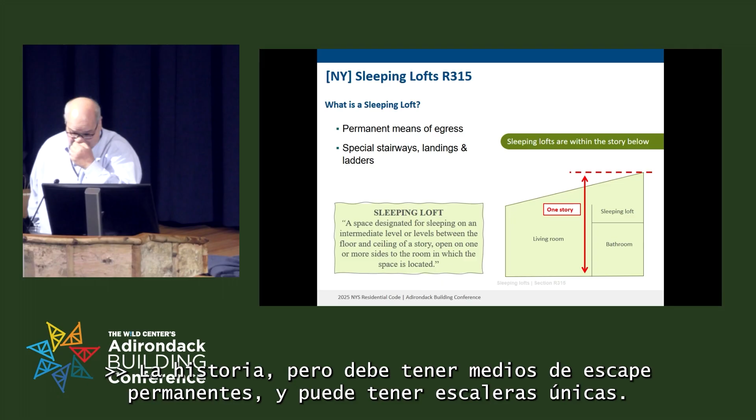But it must have permanent means of egress. And it can have unique stairs. You can have ship ladders, alternating treads, blah, blah, blah. Tarzan ropes, I assume. Just kidding. They're allowed, but they're tightly controlled.

There are limits on how big they can be. They have to be under 35 square feet, right? They cannot exceed 70 square feet. If they have to be under 35 square feet, they can't exceed 70. No, they're saying it depends on the width. It has to be above 35. All right, my note said under, sorry. Cannot be more than 1/3 of the room below.

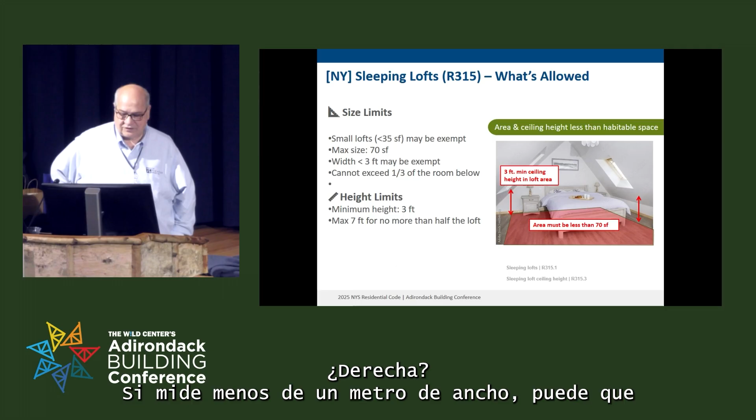This is what we're trying to do: we're trying to keep people from creating full rooms in a loft area and having problems with it, right? If it's less than 3 feet wide, it may not count the same way. We would look at it as maybe storage or access, but not livable space. The minimum height is 3 feet in the required areas, and no more than half the loft can exceed 7 feet.

This is not a full height room. It's limited by design. I'm sure this will have some changes to what people normally would do. There are some exceptions tied to sprinkler systems. If they have sprinklers, they let you do a lot more. Sprinklers cure a lot of evils. Compliant loft is small, low height. Non-compliant is too big, too tall.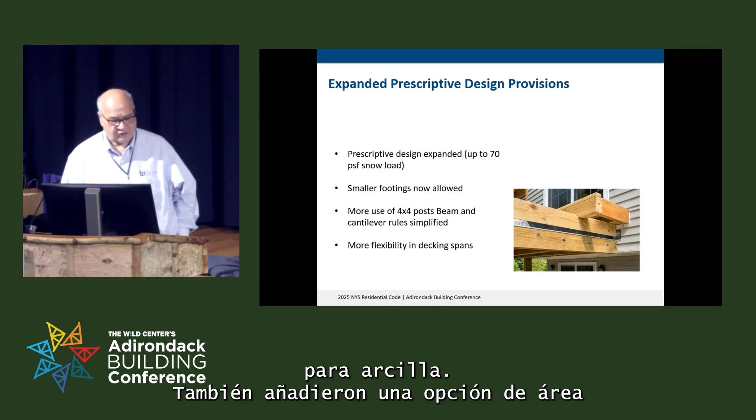Right now, the minimum footing diameters were reduced, and this is important, 14 inches is no longer the default minimum for clay. They also added a smaller 5 square foot tributary area option. So they've made it a little bit easier for us with footings.

They've changed how we can use 4x4s. They're letting them use a little bit longer. More often, they've expanded the use for 4x4s. I'm not crazy about that. I don't even know why you would do a 4x4. But this stuff's going to be coming up in your inspection, so make sure, because these guys have heard it, so now they're going to look for it. They knew it anyway.

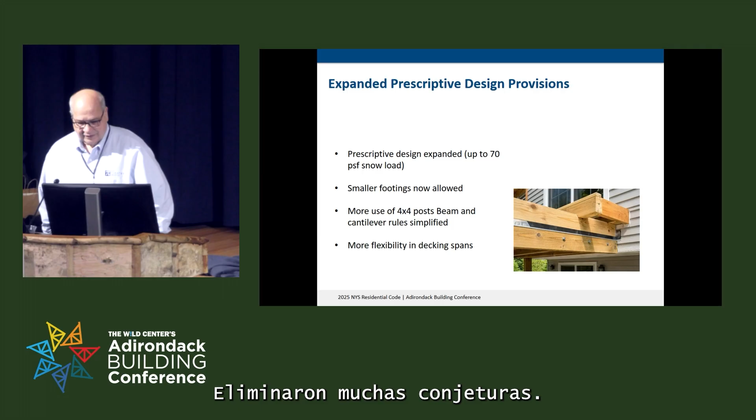If you ever tried to size beams with different cantilevers, it used to be kind of a mess. Now it's a lot easier and straightforward. They took a lot of guesswork out of it. The limits are tied directly to the cantilever limits. They're tied directly to the joist span. Nice. The deck span, there's a little more flexibility in the decking itself. Those spans are now based on single or multiple spans, more design flexibility. That's good stuff there, right?

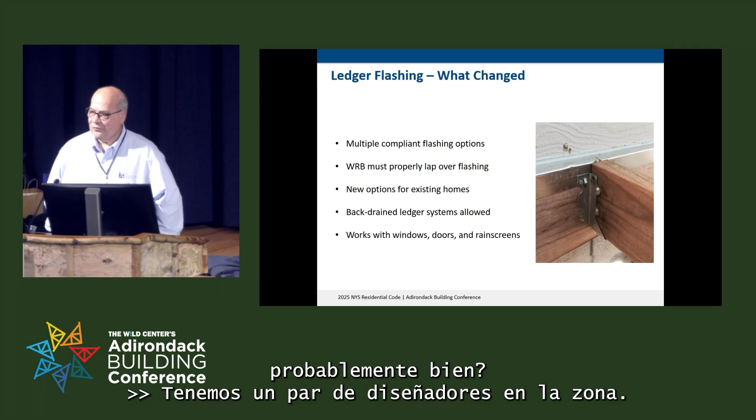Ledger flashing, some of the stuff has changed. This is one of the biggest real-world changes, right? One of the biggest inspection failure areas is the flashing. I'm glad that you're even inspecting it now. I would think, do you have much trouble getting people to use the lateral supports, like the DTT2Zs, when it first came out, probably, right? Yeah, we have a couple designers in the area. Yeah, those.

So the flashing is one of the problems. The code now gives us options, but you have to use them correctly. No longer just one way to do ledger flashing. There's different sections for different conditions. Refer to the code, take a look at it. You can use back-drained ledger systems, works with windows, doors, and rain screens, and so on. You can also use self-adhered flashing over the face of the WRB for counter flashing.

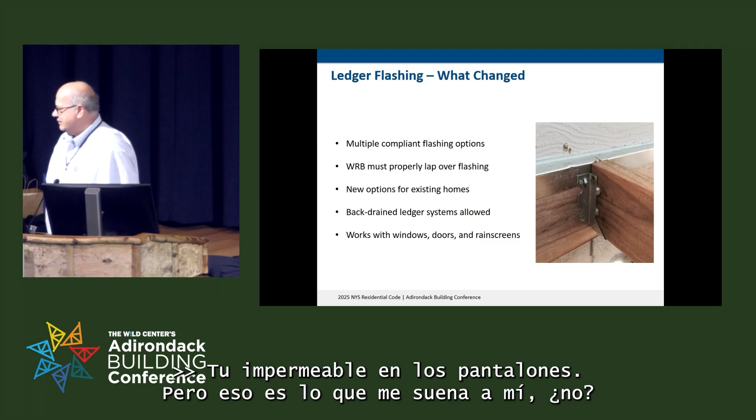So, what did you say Steve Rick calls it? Tucking your pants into your shirt? Your raincoat into your pants. That's what that sounds like to me, though, right? It doesn't make any sense to me. But the code says it's okay. I have to send that to Joe. At least one manufacturer.

Yep. Guard posts. They've done some stuff with the guard posts too. They have to resist rotation. The way they want you to install them is more to prevent rotation. They have to be connected to framing or blocking. And they cannot notch the 4x4 posts. And lastly, you'll be surprised for me to say this, but you need to follow the manufacturer for engineered systems. You've got to follow manufacturer instructions. That sounds silly to me, but.

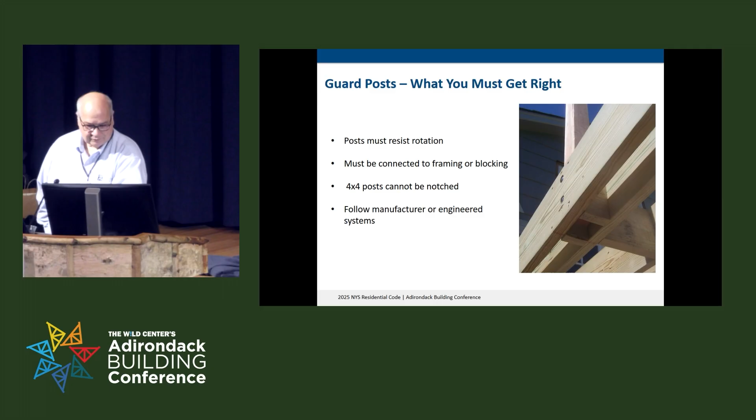And so on. Hey, what happens if you park your boat in the garage? Is it still a garage? I mean, even if it's on a trailer. Yeah. Trailers are considered, they don't have motors. I'm aware. Okay. I get punchy this time of day.

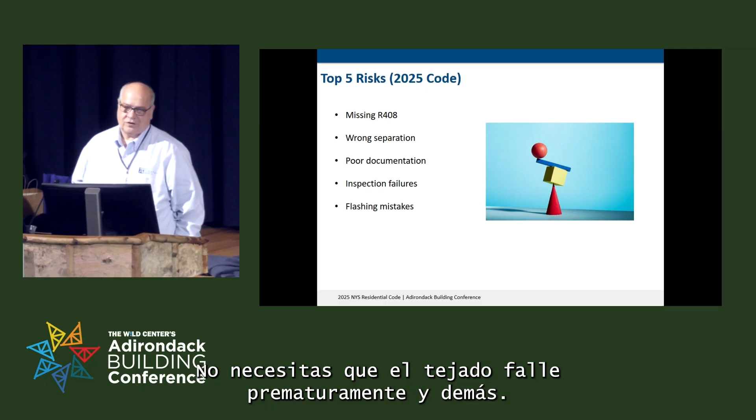And flashing mistakes. Flashing mistakes are huge. All over the place, they're huge. And not just for the structure, it's the durability and the resilience of the building, the energy, because wet stuff doesn't work as well. You've got to make sure you do the flashing right. You don't need these decks falling off. You don't need the roofs failing prematurely, and so on and so forth.

What's next? So who needs to do what? The builders, you need to build it right. Whoever you guys are, build it right, which I'm sure you are, you have been. You've been building it that way for 40 years. Why do you got to change now? Right? Or 50 years, depending on what it is.

But no, make sure your fire separation is correct. The materials and the details match the plans. Make sure that you're complying with the plans in the field. The designers, make sure that you put out code compliant plans. I know you always do. At least in your opinion, or in our opinion too. Make sure you have the details in the assemblies.

I'll give you a hint for a place to go look for some of these details that we're looking for, at least on the energy part and maybe more. Building America Solution Center. Just Google it. Building America Solution Center. It's from PNNL, isn't it? Or no, something like that. They got CAD details, they've got drawings, they got pictures, they got references.

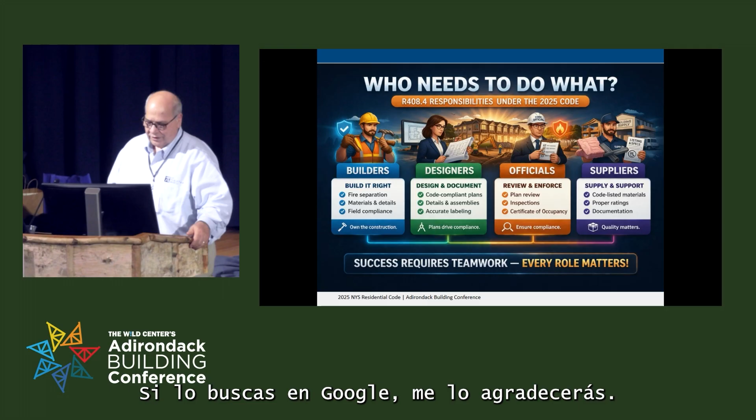It's a great site. They even have, you can try a wall out if you want to see if your wall is good for thermal resistance and for water or moisture resistance. They've got a section on there for that. It's free. It's cool. There's no copyright problems. Building America Solution Center. If you Google it, you'll thank me.

Officials, review and enforce. Be nice. They're going through a lot of changes. We're going through a lot of changes. Be nice on how you deliver the news, right? But you've got to obviously be thorough. I think you've got some new checklists coming out soon.

So 3 weeks ago, last week Ron Stark said that he was supposed to have them that week. That's who told me that 3 weeks ago. Yeah, I know. He's been telling me that for 4 months, 5 months. But supposedly you're going to have some new checklists coming out. Don't forget that pesky certificate of occupancy as well, right?

Suppliers, if there's any suppliers still here, all right? They're your biggest source. Designers, builders, even code officials. The suppliers are a great source for you. Maybe not themselves, but their manufacturers. And keep in mind, the biggest changes to the codes came in the 2021 version. The 2024 was a little tweaking and bringing it up. So they're already prepared for most of this stuff.

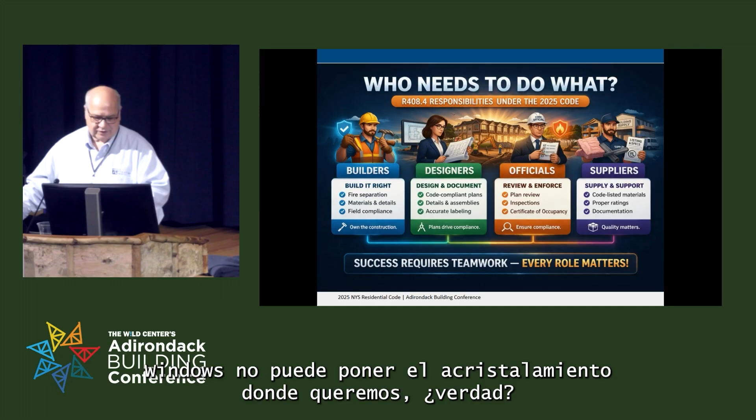The manufacturers who put all this stuff together that the suppliers sell already have dealt with this, except apparently Marvin Windows can't still get the glazing where we want it, right? But utilize them. They're a resource. Almost all the manufacturers have a building science person, a code compliance person. They're the ones that are there, and they're the leading guys. And all they hope is that you buy from them. Who knows? You might.

So make sure you get the documentation to them. If you're sending them something on the site, deliver documentation. Just like when you deliver trusses, you deliver the truss drawings and the layouts with it. Deliver the instructions with it too, so they have them.

The mindset, the code mindset shift is compliance. It's compliance, I think that was supposed to be an equals, design and documentation, right? We're shifting from field fixes to design-driven compliance. We're making sure we do the work first.

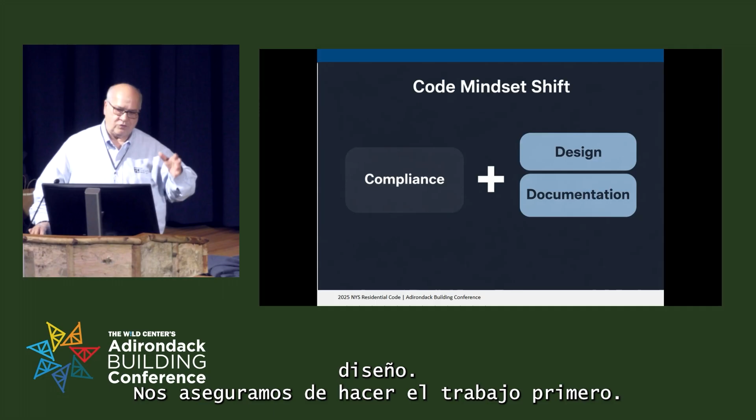The other thing you're going to start seeing is the codes, as they change, are going to become more performance-driven, more design and specification-driven. There's still going to be the minimum standard, but on the energy code, like Kevin said, R60 was a waste of money, right? Well, he didn't specifically say it that way, but I've been saying it for a while. They aren't going to do that anymore. There's going to be more testing and verification and proving that what we're putting in there is working. Right? The only way to do that is with the ERI path. So, anyhow.

Come up with an action plan. Update your plans, train your teams, coordinate early, plan early to control your cost. If you wait, the code controls you. If you plan for these changes early, you control the cost, the schedule, and the inspection risk. If you wait until the inspection, the code will control you.

And with that, I'm going to open the floor up to questions if you have any. If not, I think it's going to be happy hour. Oh, it is. You got 12 minutes. That's exactly what I planned on. But anyway, questions?